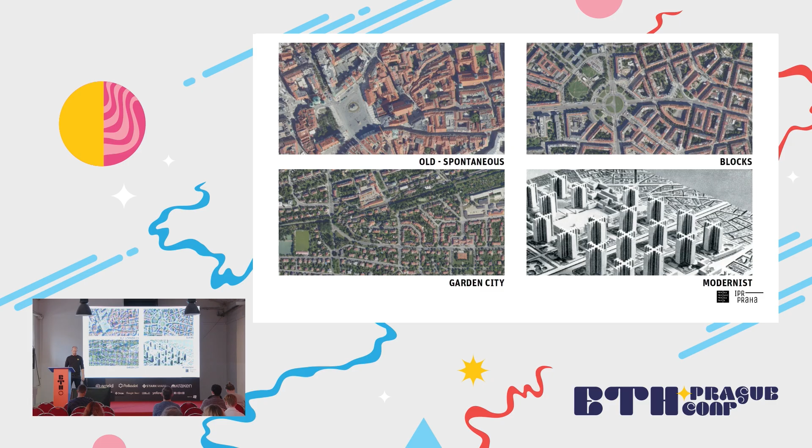Then in the second half of the 20th century, the urbanists came with the planned city, the modernist one, where you segregate each function - a place to live, a place to work, a place to have fun - into different areas.

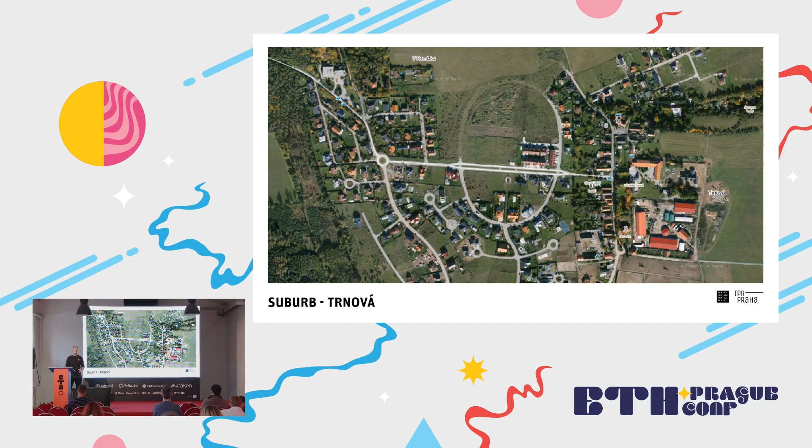And then we have the worst of them, it's the suburban. Because this is the type of city which has no benefits at all. You only live there, but you don't have the living experience of life in the block city. You also don't have the experience of living in the historical city, and you don't have the open green spaces of the modernist city.

This creates structures with infrastructure and streets mostly focused on cars. Our society is car dependent. It's like a drug, like a sugar that we need to function.

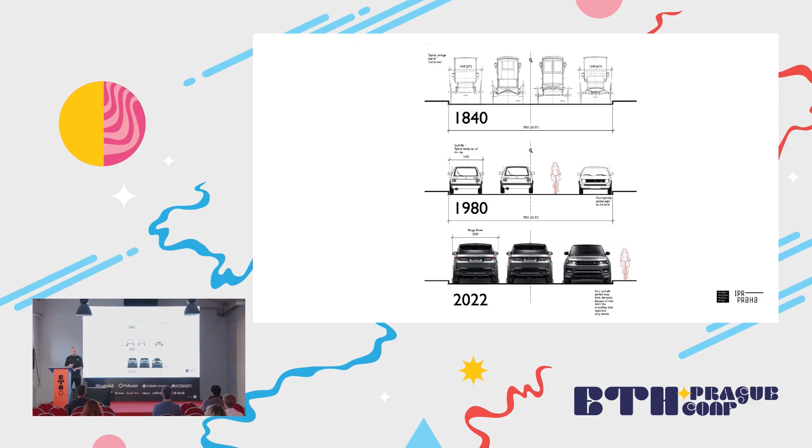Here you can see how throughout the years we've changed the size of the carriages to cars and then to our modern SUVs, but the streets are still the same. We have still the same width that we need to operate in. We need to put the pavements, the street, the trees, everything in this space.

But if we want to do the same with cars, we put a highway there. And as you can see, the need for space for this highway infrastructure is much bigger, and also the impact on the city is much more pronounced here.

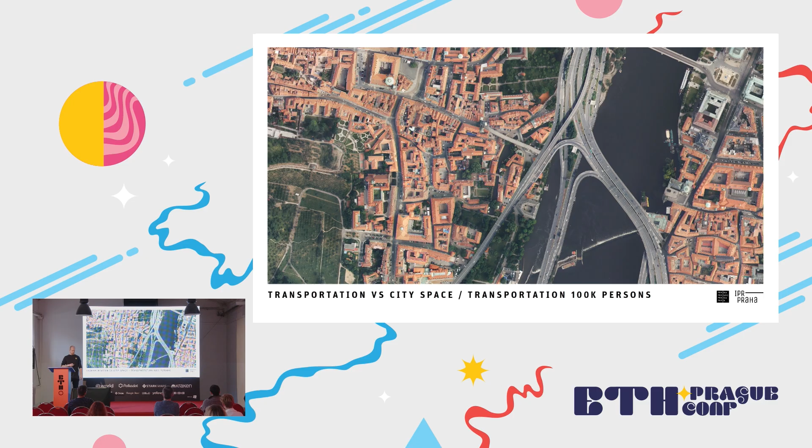So we have public space, but we have cars. We have to park the cars. The cars, most of the time, they are just idly sitting by. 90% of the time, the car is just parked. So we kind of changed our public space into parking space.

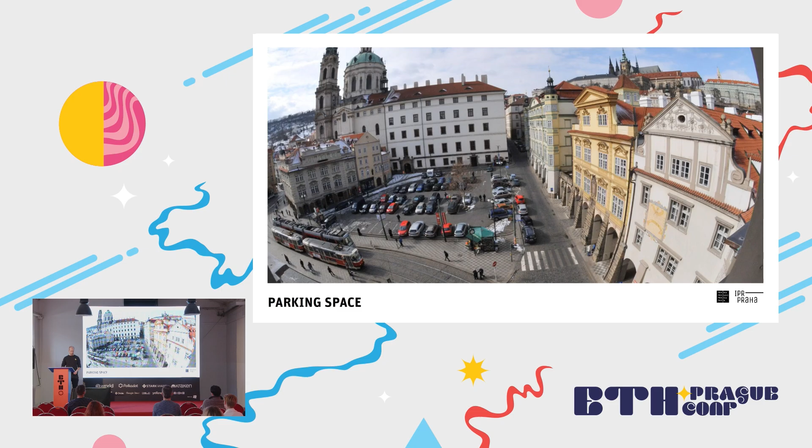In Prague, we have many of those parking spaces. This is Malostranské náměstí, the lower half. But here we managed to get rid of the cars, and suddenly the life can happen there. For me as an architect who goes to these conferences, these images are kind of banal, almost absurd. But I suppose this is a crypto conference, and we still have to live in the real world.

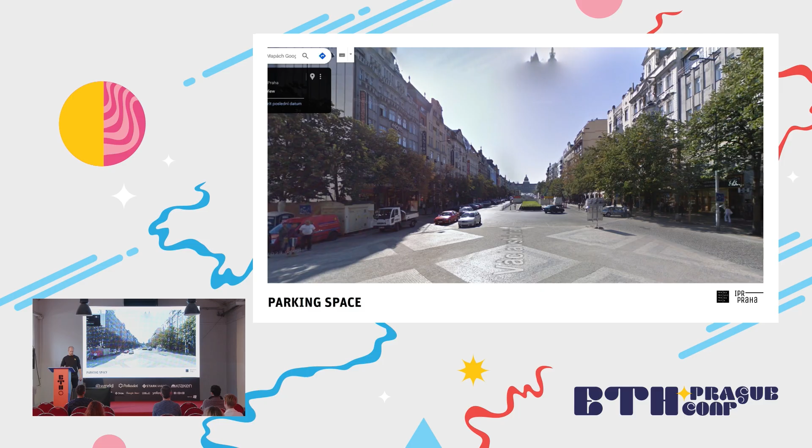Then we have Wenceslas Square. It's already been remodeled into this public space. So we take slowly back what is ours from the cars that we gave them in the 20th century.

So interests - in a city, in a public space, we have to deal with loads and loads of interests. We have to deal with the human scale, the quality of movement. We have to take care of everyone's need to provide universal design, so we are able to access places with a pram or on a wheelchair, or if your leg is broken - that's what you need to put together to create a space.

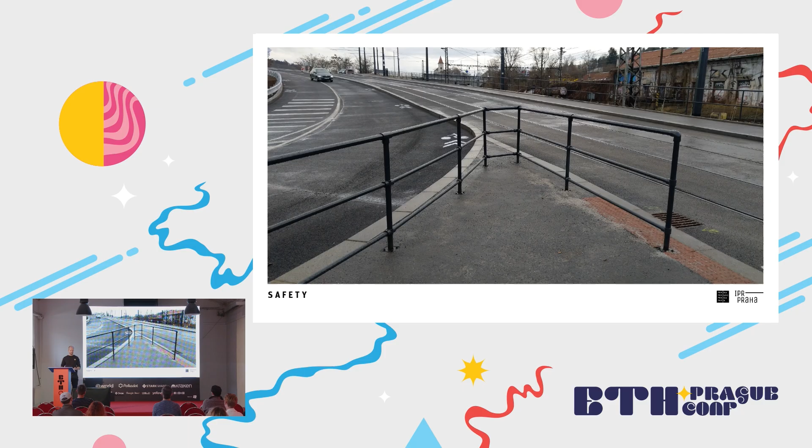But sometimes those interests are conflicting with each other. For example, we create safety by putting rails to protect us from the cars, so the cars won't park on the pavement, but maybe in reality it's to protect the cars from the pedestrians, who knows. And this is our Czech Prague very own Titanic moment - you can go there with your loved one and do the thing, I suppose.

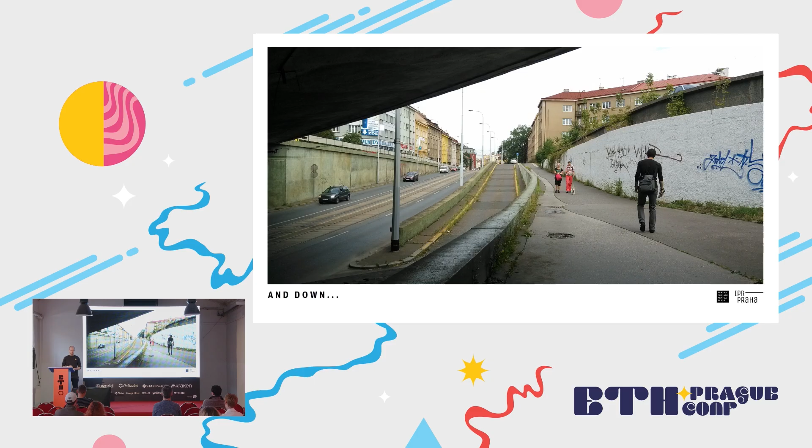Also safety, you can go up and you can go down. These types of things create a hostile, not really good environment, when the people who are not in cars have to take care of the people who are in cars and give them preference, and that's not right.

This is how you put a sound wall into a city to make it better for the people who live in the yellow house, so they can have an almost normal, quiet life. Or maybe you can just reduce the traffic on the street, who knows.

Some things are temporal and some things are permanent, but sometimes the temporal can slowly morph into permanent, like this one in náměstí Bratří Synků - yeah, we just put stuff together.

This is a nice, quiet street next to the Prague Castle, and it's fine, right? But you can put a lot of things over there. Is it better? Is it necessary?

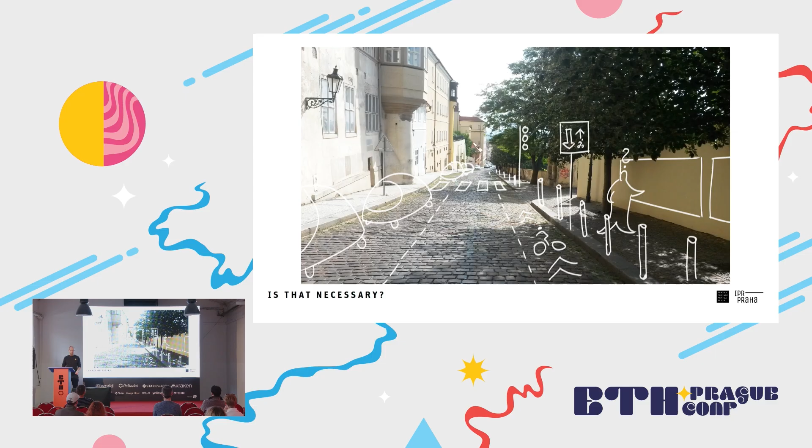In our everyday job, we try to make the place the best with the minimum use of hard infrastructure - just software is better. And this is a quote by Jane Jacobs, because if we create the cities for everybody, it creates a better society.

Our office, our institute, creates loads of manuals and booklets and books and presentations, and that's the easy part. The hard part is actually to implement them.

So in this last part, I will just brief you on our design principles, what we use, and what we are implementing to get to that aim - the city that is livable and friendly and for everyone.

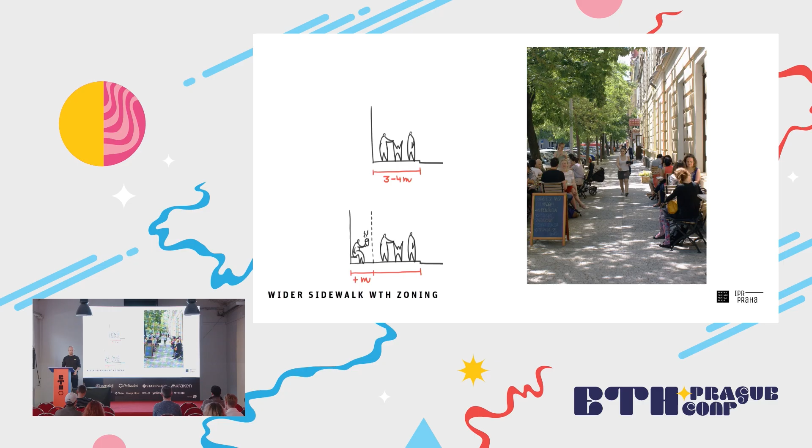So sidewalks - just make them wider. Why? Because then somebody can put up a table over there from a cafe or park a bike there, and life just flows there.

If you have a crossing of two streets, you can enlarge the corners, so the distance pedestrians need to take to cross the street is lowered, and also the radius for the car is smaller, so they have to go much slower.

Then we have to take care of public transport, to make the stations and stops accessible and safe to use.

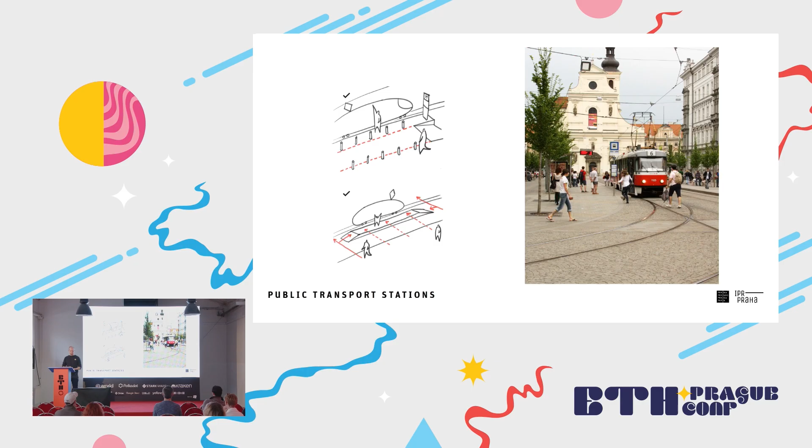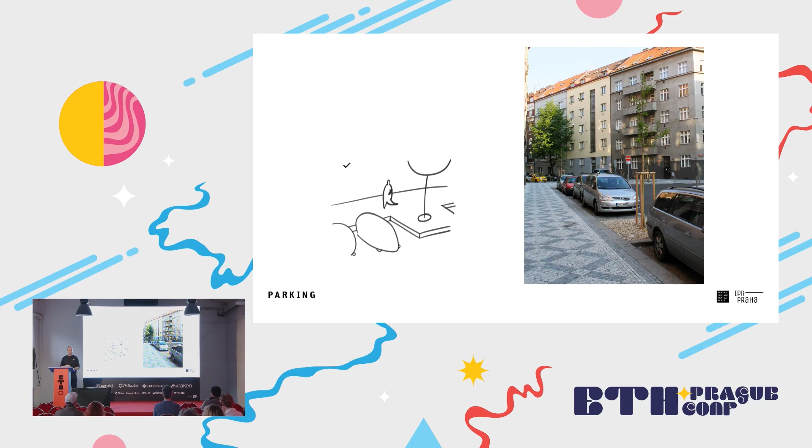We can use grass for parking.

And my office deals really a lot with materials, either with the street furniture — Prague as a city, I think for 5 years now, has had our own set of bins, benches, bicycle stands, tram stops, everything — and then there's the material of the pavement, so you have stone, concrete, and asphalt.

We are currently trying to implement the idea that when you have a sidewalk, you should always use some kind of tiling, because under the sidewalks there are many waterways and internet wires and stuff like that, and almost every half a year somebody will go there and make some change. If you make it from a surface like asphalt, one sheet of asphalt, then when you dig in you leave those marks, but with tiles you don't have to do that.

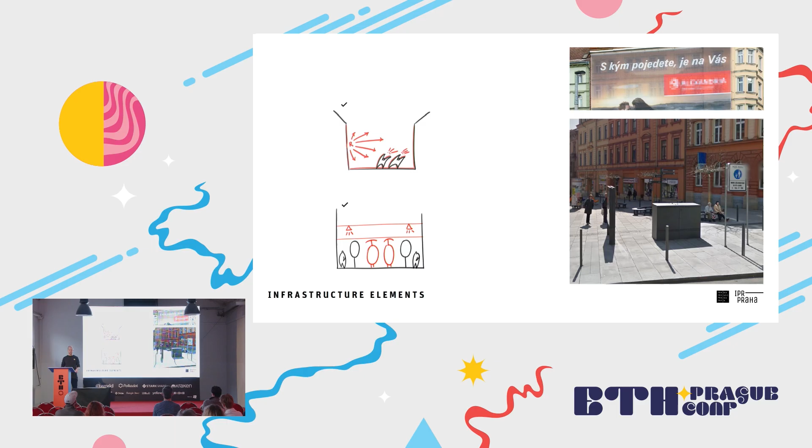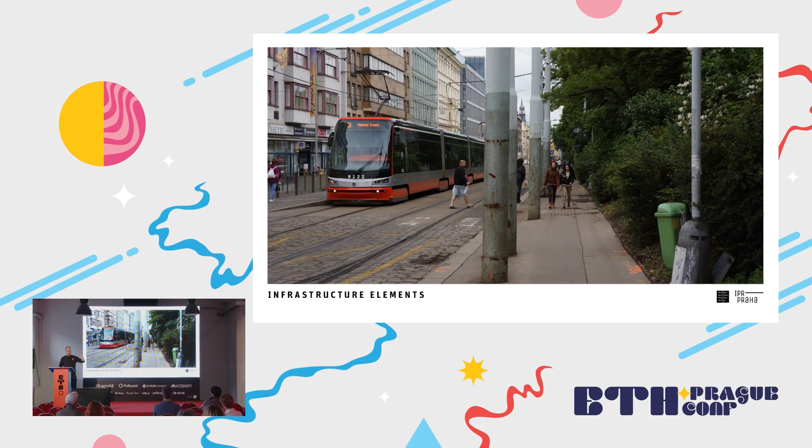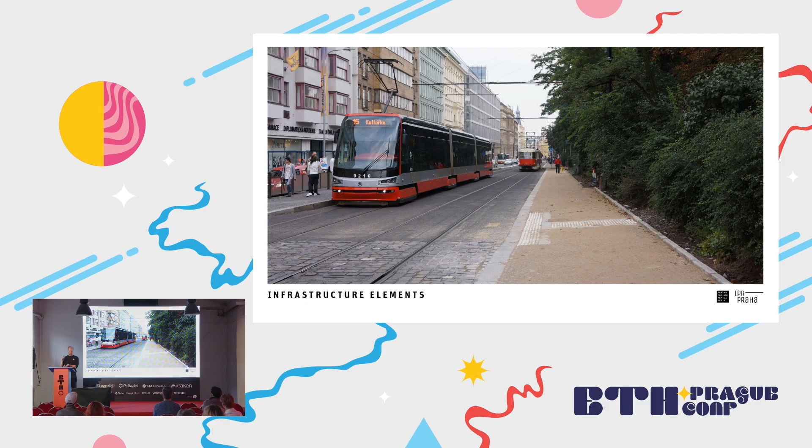In Prague we have many things that serve the city, such as electrical crates for the road lights and for the trams. This is how we see the pillars — they are for the trams, for the wires that bring electricity to the tram. But maybe if you can just put them slightly to the right, and maybe even put street lamps on the same pillars as the electricity for the trams, it's better.

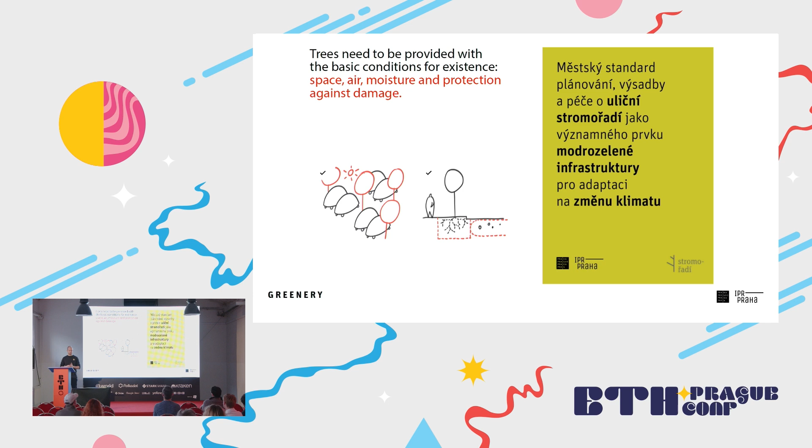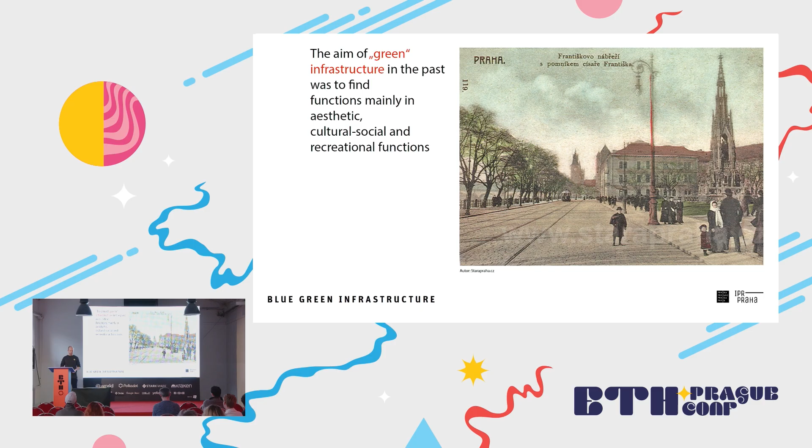And the last point is green infrastructure, the blue and green — how do we call it? That's becoming more and more important nowadays, because previously we used trees in cities to make pleasant, nice environments, but now we have to deal with the climate crisis, and trees and greenery in general really help with that.

So how do we do it? If we don't, we get an urban heat island — meaning the surface level temperature of a city is, say, 2 or 3 degrees more than the countryside surrounding it.

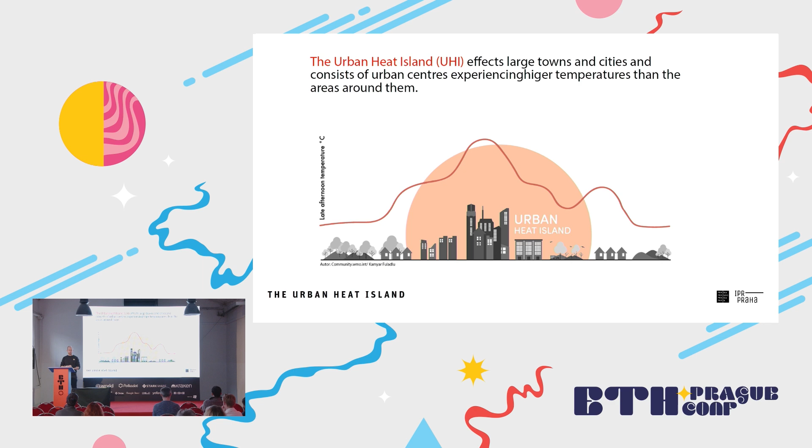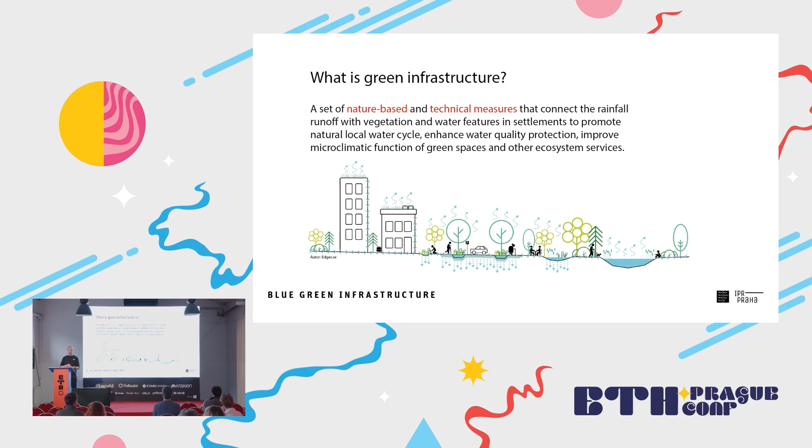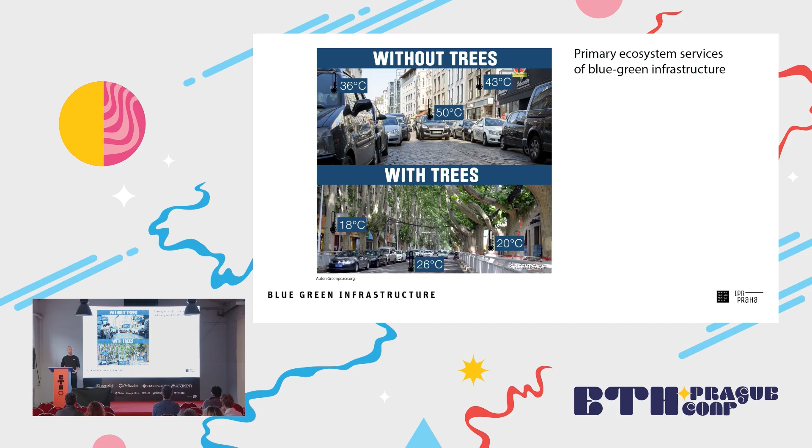If we implement blue and green infrastructure, which means we take care of the rainwater and use it to water the trees, and design the trees intelligently so their root systems are connected together, we can get a really nice drop in temperature. This will come in handy in the future—from the 50 degrees Celsius back to 26 or 20s, which is much more livable, in the sense that you can actually walk or live there.

We have these storm green patches where there is some gravel, and in the gravel there are small bushes. When there is a surge of stormwater, these areas are able to soak up the excessive water and keep it in that place. So we are no longer taking the water that falls from the sky and carrying it away with pipes. We are moving away from that.

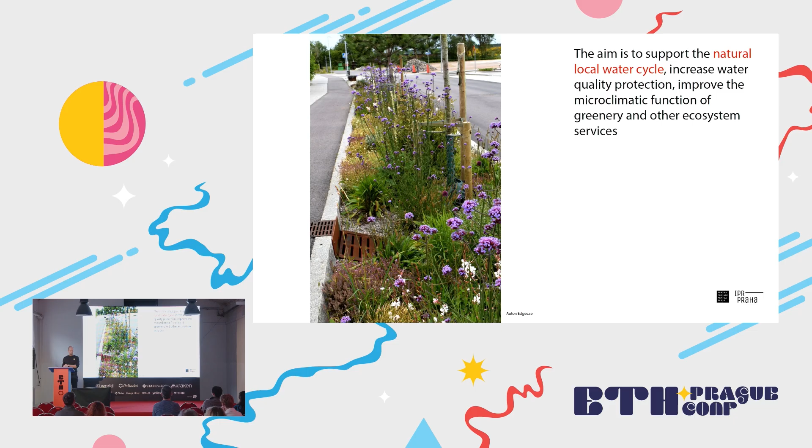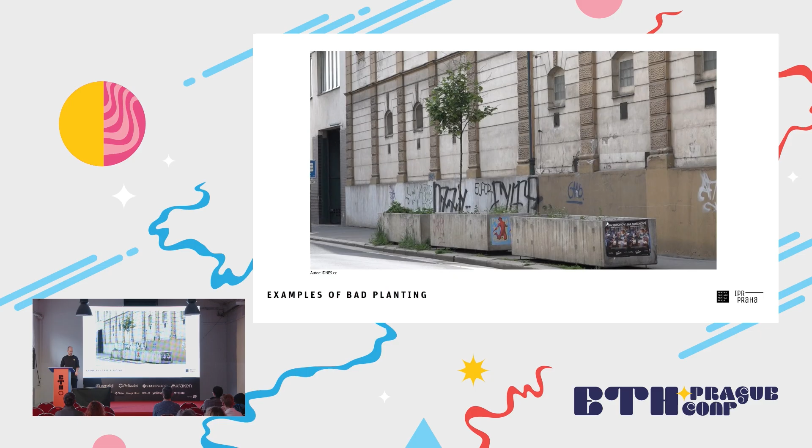If you have time after this conference, or are staying longer in Prague, I want you to come to Smetanovo nábřeží and see for yourself, because these trees have been there, I think, for 4 or 5 years, and right now they look better—more foliage, bigger overall shape—than the trees across the street that have been there for decades. It really speaks for itself.

Lastly, I'd like to present some big important projects we do in Prague. The first one is Muzejní oáza, the area around the National Museum in Prague. Right here is Wenceslas Square, which is currently being remodeled. We are adding a tram line there, which will connect the tram lines from Vinohrady down to Vodičkova station.

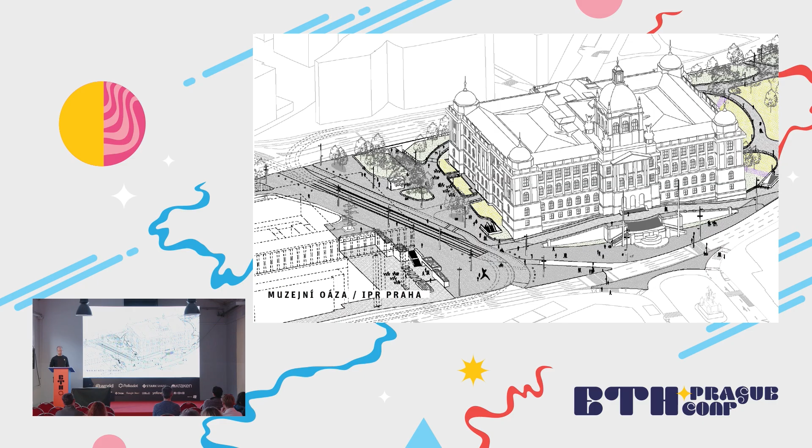This will enable us to deal with hiccups in traffic when there is a car accident. Nowadays the trams are stopped for 10, 15, or 20 minutes, but with that new track we can go around. We are also adding new pedestrian crossings in front of the museum, trying to reduce the impact that the Magistrala, the city highway, has on the center of the city. This is how it looks today.

This is a visualization of the upper half of Wenceslas Square, and I think it's due to be finished in 2027, if everything goes all right. Right now, for example, they are building a huge reservoir for the rainwater, and they've been building it for about a year now—a huge reservoir for all the trees.

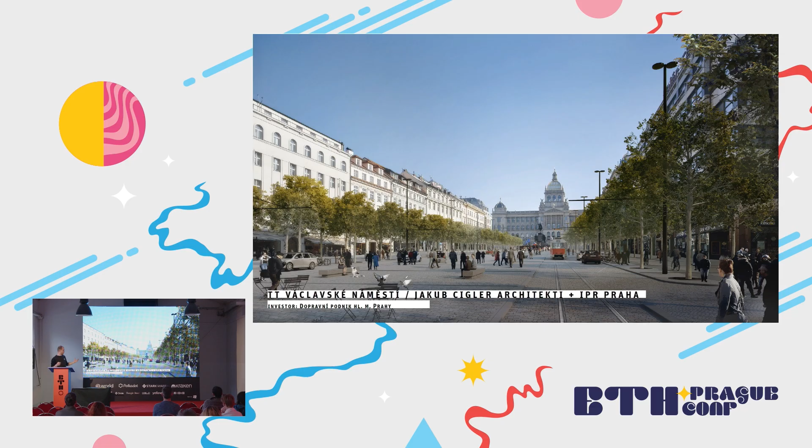The next one is Karlovo náměstí. I've shown examples for Karlovo náměstí here multiple times. We had an international design competition, and this is the design that won the competition.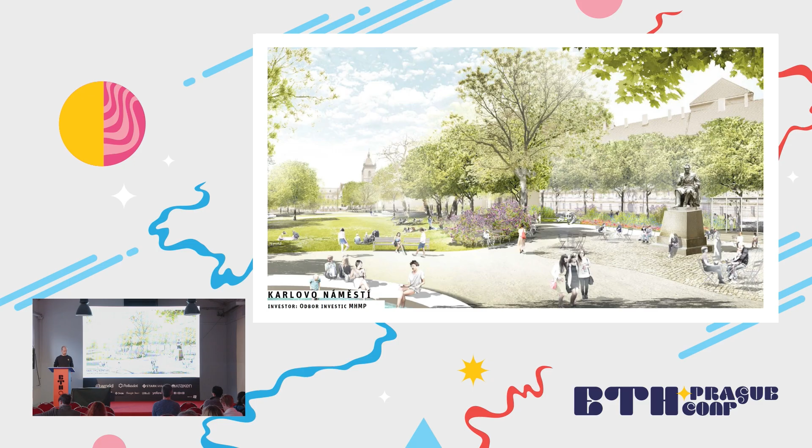Just to illustrate how hard it sometimes is to work in the city—when I talked about interests, we don't only have the interest as an abstract idea, we have institutions and people who represent these interests. We have heritage protection, which represents the shape and image of the city as it used to be. Then we have the traffic police, and people who represent blind and deaf people. We have to put them all together around the round table and get some result. That's also the reason why it takes so long sometimes in Prague.

And the final quote—I made this quote—the image and the shape of our cities will define our future. Thank you very much.